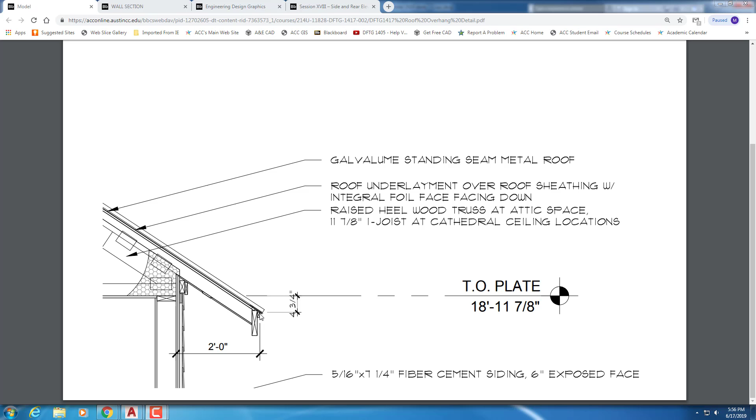Also, in this particular case, our roof pitch ends up, if we're at 2 feet out, we're 4 3/4 inches down, more or less fractionally, to the top of the trim. So that's what we're going to use in the elevations. So from the plate height, let me show you the wall section. From the plate height, which is here, this trim board ends up being lower than the plate. You never actually see the top of the plate in the elevation, but depending on where that is, it's going to determine how far this drops down.

And the higher the pitch, the shorter the overhang, because you're pivoting off of one point. Obviously, this point over here keeps getting less and less if you pivot off that same point. So you can kind of see it here. Here's the top of the plate. Here's the top of the trim. So the top of the trim here is 4 3/4 inches down from the top of the plate there.

Think of the framing, which we talked about last week, as the skeleton of the house that holds everything up. And it also drives where things are placed in the elevation. So you can think of the exterior materials as the skin, the framing as the skeleton. You never actually see the skeleton, just like you don't see the skeleton through your skin unless something's wrong. So it's sort of the same idea, but where that stuff is determines what you draw in the elevation and where you draw it. Okay, so that's just something to bear in mind while we do this.

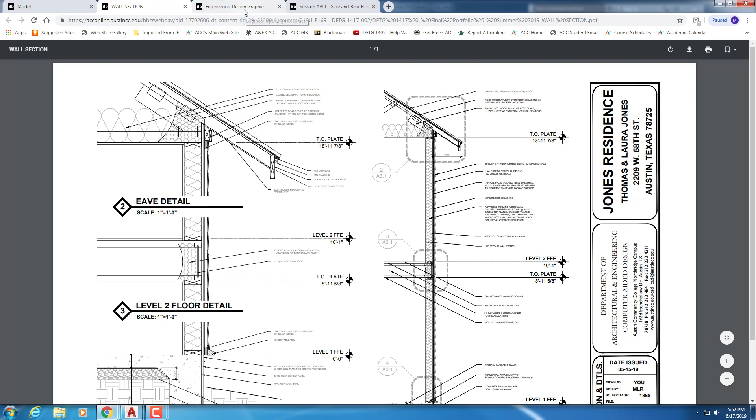So the very first thing we're going to do tonight is actually create a UCS to use. It just stands for Universal Coordinate System. It's a way that you can turn the drawing so you don't have to draw sideways or upside down, basically.

There will be several new layers for the elevations and also some new layers for the roof plan as well. You don't have to add those just yet, but there will be all those new layers, and then we'll create some new layer states as well, because we're going to need one for the first floor, the roof plan and the elevations, and also for the second floor, the roof plan and the elevations, so you'll be able to orthographically project things from the floor plan.

If your second floor is not currently stacked over the first floor, now is the time to move it to the correct position, because you're going to have to do that to orthographically project, like I'm going to talk about. All right, so UCS.

Some people like it, some people don't. I've been asked by Erling Clark to do it this way because it's the way they teach it in 1405. A lot of people actually line up the elevations all the way across and just project back and forth that way. But this is the other way to do it with the UCS, and it's a good way to know.

If you're using one building, it works pretty well. If you're using multiple elevations, it gets a little bit tricky because you've got so many lines going on, but there's a lot of lines just with one elevation.

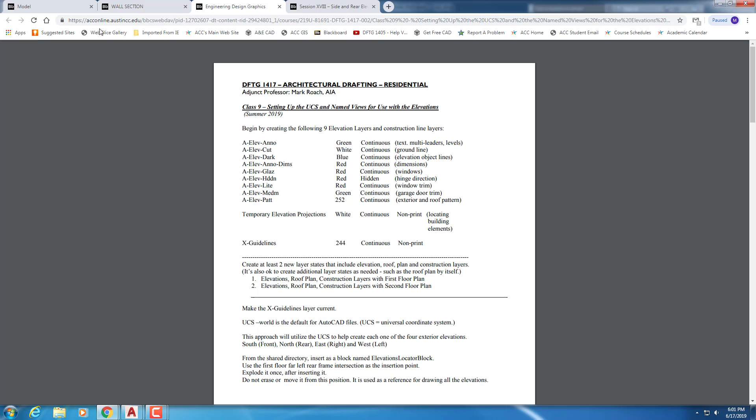All right, so I'm going to open AutoCAD. All right, so if you're finished with everything, this is for the first and second floor. This is where you'll be at, and you'll have the first and second floor set up.

I've got all my model layers turned on and thawed right now. By the way, this is turn all layers on, the third one down, and this is thaw all layers. So if you ever want to both turn on and thaw all layers, just hit the first and third buttons there, and that does it very quickly.

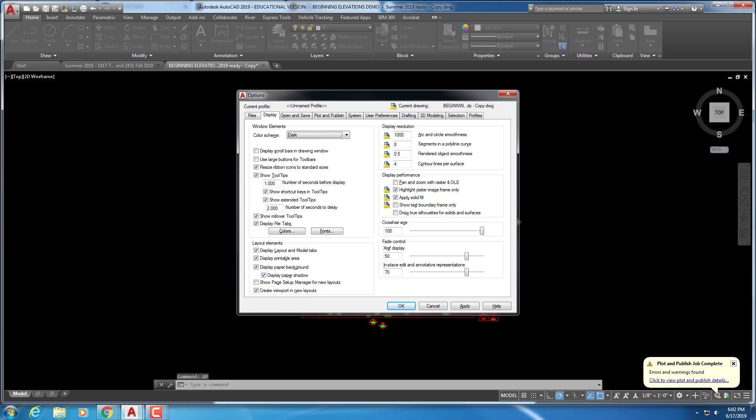Another thing I noticed with a couple of people, and I always forget to mention this, if you go to options and go to selection, I don't like the lasso at all because it doesn't work well for architectural drawings. I would uncheck that, and that way when you come back in and try to window or cross something, it comes in as a rectangle rather than that weird shaped lasso, which doesn't do you much good in architecture. It takes a lot longer to do things with that than just with the square.

By the way, there's a difference between windowing something and crossing something. If you go from right to left and get the green, it catches everything it crosses. If you go the other way and get the blue, it's only the stuff that's inside the box that it's going to pick up. So in other words, if I went this way, even though I've got three lines there, the only thing it might pick up is that, but it didn't even pick up that because that's a block. So let's try a different one.

So let's say like here, I crossed this line with it, but it didn't pick up that line because it has to be in the box for that direction. The other direction though, it'll pick both lines up. So the crossing direction picks everything up, the window. The other direction, the blue box, only the stuff inside the box.

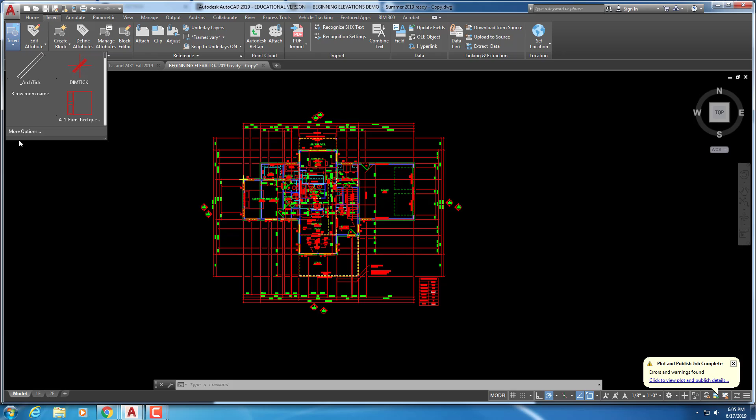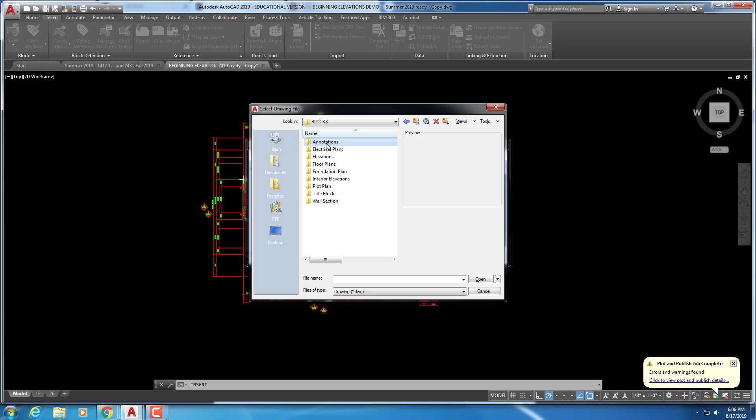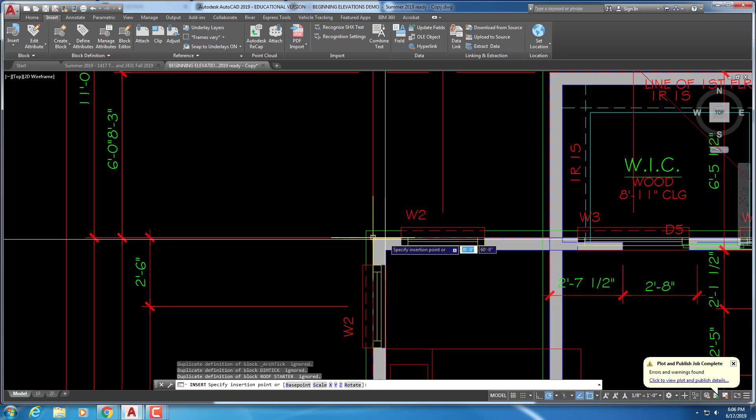It's going to come in with kind of an X. So basically it goes right here. It's the far left at the back, right there on the framing. Once it's in, it should look something like that.

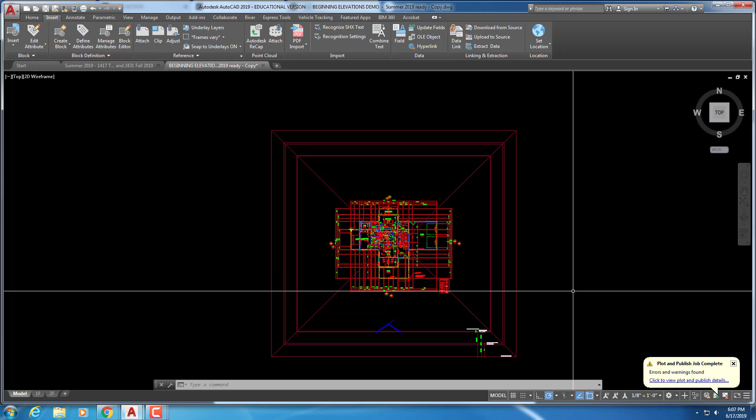Alright, I would leave it unexploded for now. We'll have to explode it in a little bit, but for now that's fine. Hopefully your ortho was on. We don't want to be skewed one way or the other, should be exactly vertical and horizontal. If you have a more square plan, you could have used a square, but basically I had to expand equally in both directions for this to work. But basically these are 45-degree lines, and as long as we're crossing the lines in the same place, we can project around.

Alright, to create the UCS, and I'm going to do the one for the right side elevation, or the east elevation, first. So looking at it over there, X would be up and down and Y would be at the bottom like a horizontal line, and you do that by using the 3-point coordinate. Alright, so you've always got the X direction, the Y direction, and then where they cross is the origin. So this would be X, like the ground line in that direction. This would be Y, and you can see that it turned the drawing.

Alright, so what we need to do now is come up here and name the UCS. It's the one to the left of the world there. Alright, so we got the unnamed, right click, rename, and we'll call it... I erased it, what is that? That's going to be the east, which is actually the right side. You have to okay that twice. I've never understood why you have to okay that twice, but you do.

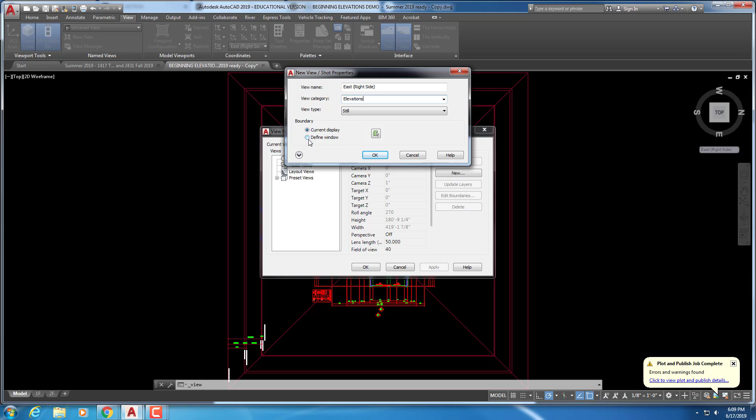Same thing we just typed in: east, right side. View category is elevations, view type is still. Current display would be fine, but we wanted to define the window. You can either check this or check this, it's the same thing, either this icon or that's going to come to the same thing, it's going to give you that. You want to go from the bottom corner to the top corner here, and then enter, and then say OK, and OK again, and that'll create a named view for that direction.

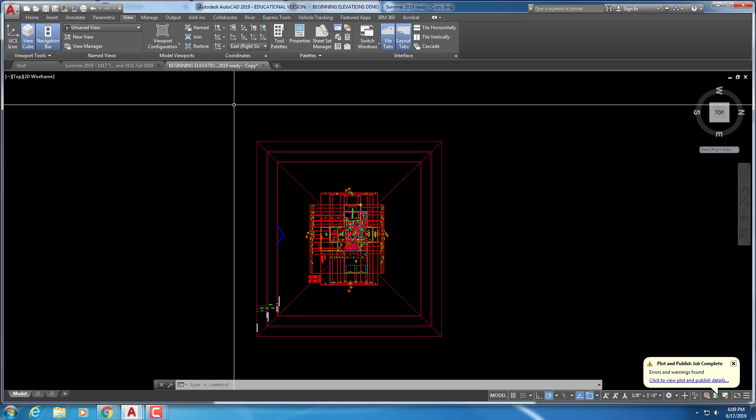Now if you could keep track of the X and Y without having to worry about it too much, you could just continue on from there. For me, it's just better to go back to the world and then work my way back through each elevation. So if I set it back to world, it sets it back to the original. So if I go to do the rear view now, this has to be X because that would be the ground line, and if I'm looking at it in that direction, then the left side's going to be over here. So 3-point origin, this would be X, this would be Y.

Garage should be over here. If it's not over there, you did something wrong.

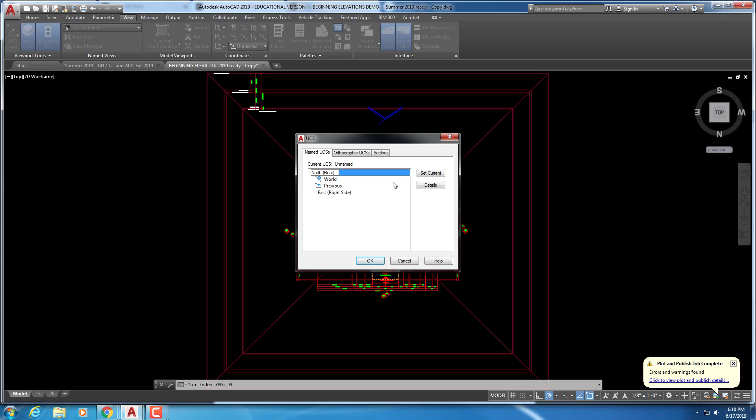All right, so then we're going to name that UCS, and this one's going to be north. Got to right click, rename, north, rear. Say OK, OK it twice, and then we still need to give it a view name.

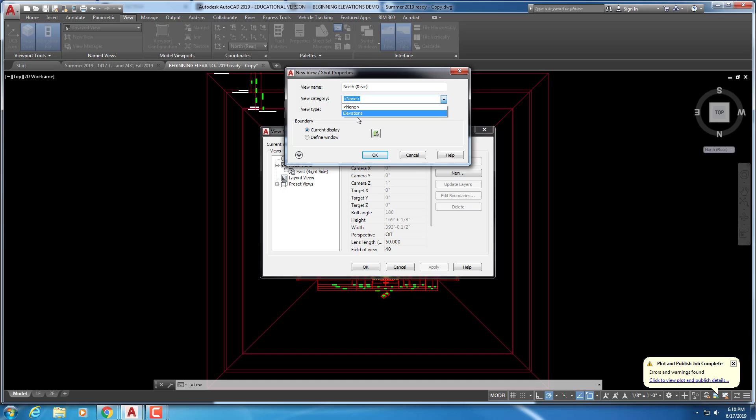So view manager, new. View name is, what did I just say, north. View category, you can just use the drop down because we've typed it in at this point. Hit the icon, go from this corner to that corner, enter that, and OK it.

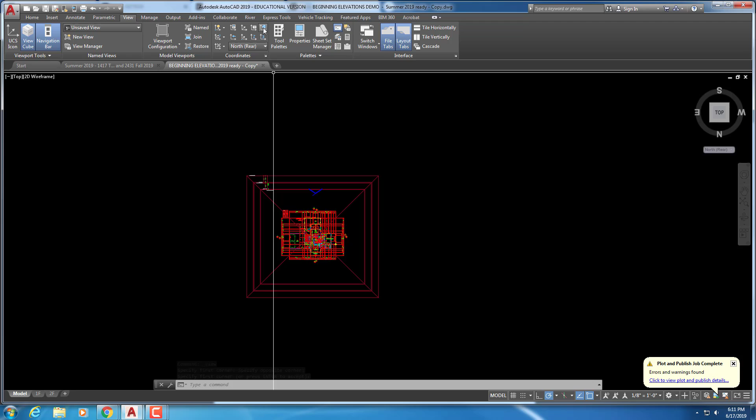Alright, so that gets the rear. I'm going to go back to world again. Again, you don't necessarily have to go back to world, it just makes it easier for me to think about it. Alright, so over here, this would be the X direction. That would be the Y direction, so 3-point.

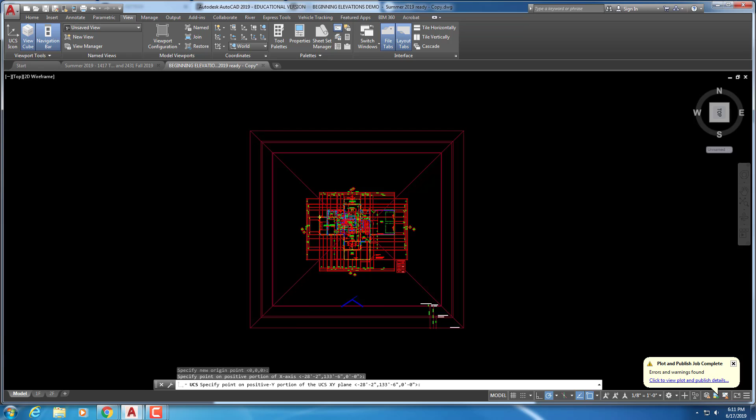Origin is here. I just almost did that wrong. This is the X direction. This is the Y direction. So the front porch is out on the right side, the rear porch is out on the left side.

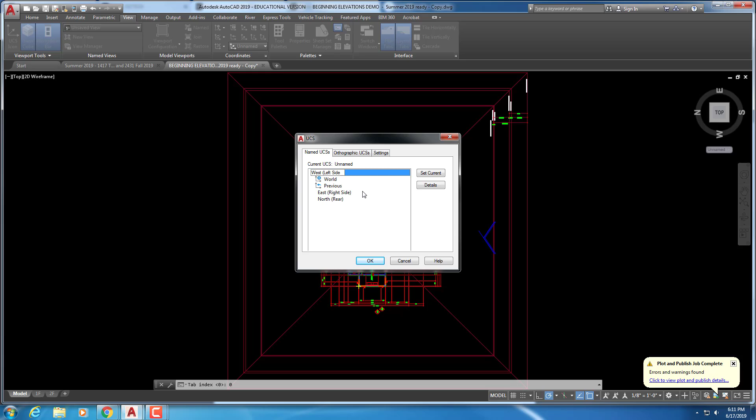All right, we're going to rename the UCS. So that's going to be west, which is also the left side. Okay, that twice, and then we're going to create through the view manager the same thing.

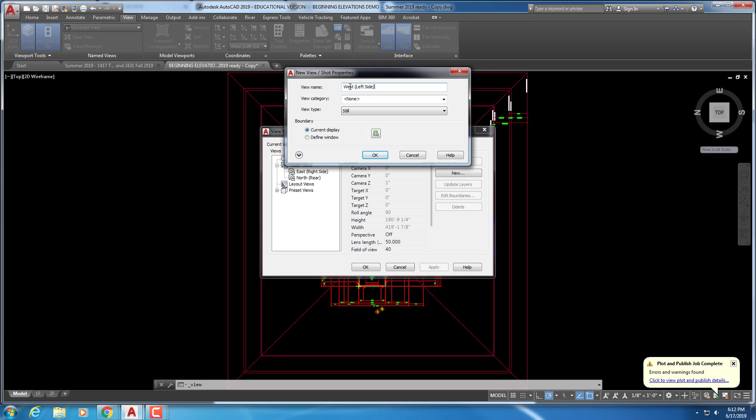Okay, that. All right, and then I'm going to go back to world again, which brings us back to the beginning. Technically, I guess you wouldn't necessarily have to create it, but to do what we're going to do with printing later, we need to set up a view for this. So we're going to go ahead and do it anyway.

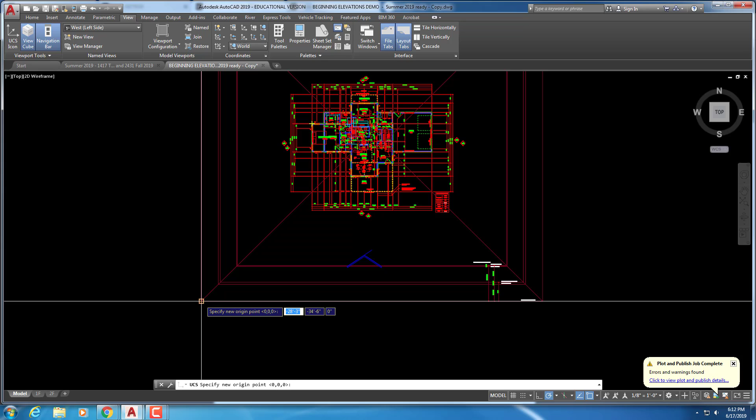So 3-point for that. This is the X direction. That's the origin. That's the Y. So it looks pretty much the same, but we still need to rename it.

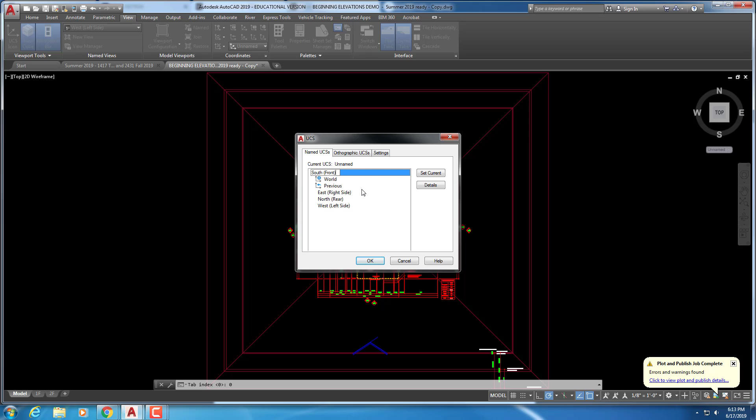So this happens to be south, which is also the front. Okay, that twice. And then we're going to create a view for it through the view manager. New, again, south.

What did I just say? Front.

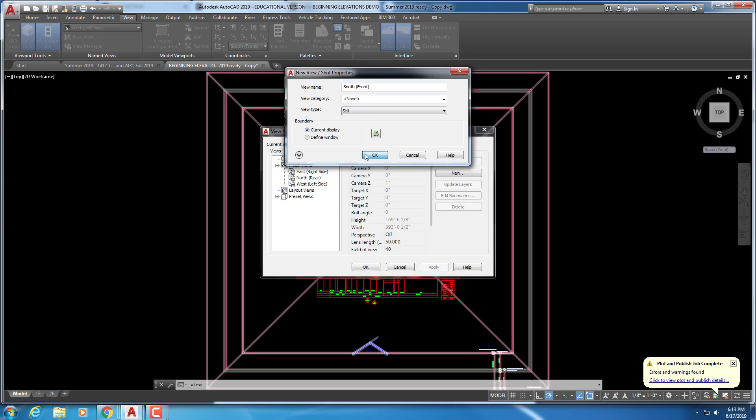All right, so we now have both named UCS and also named views. So we've got east, north, south, and west, and we also have it here.

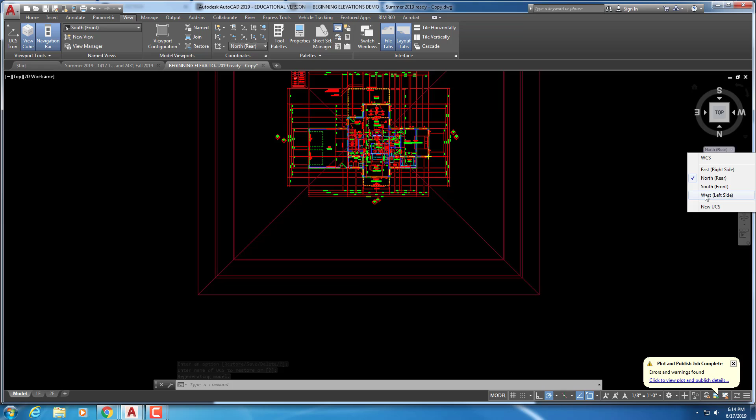All right, so the advantage to this, or at least some of the advantage, is you can turn the drawing now in the direction you want to. Typically you would draw down here because you'd be projecting down and that's the direction you'd be drawing in. So you could pick any one of those and turn it whatever direction you need.

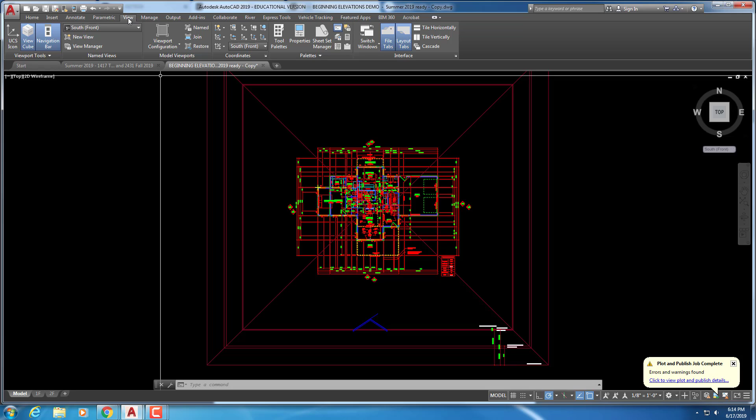And you can do it from here. So whether you're in the floor plan or in the elevation or the roof plan, you can turn the drawing whether or not you're in this particular tab. So it allows you to do that over here.

Now, before we do anything else, you should probably create the layers, because we're going to use those to set up the layer states. You're going to have several new layers for the elevations and also for the roof plan.

So, elevation anno for the text, dimensions for the dimensions, cuts the ground line, darks the main part of the elevation, glazing is the glass. Hidden is usually the hinges on the windows and doors. Lights has to do with trim and some other things.

So does the medium and patterns, the siding and roof patterns. And then we've got text dimensions, basically the wall layer and the roof outline itself, and then beams, and then the patterns on the roof. So all these layers here, there's two different handouts, one for the elevation and one for the roof.

The roof, I think, is behind everything else at the very end. The elevation layers are here at the beginning. It also has some additional temporary elevation projections. If you want to do that, you can. It's not necessary, not technically necessary. Sometimes it's good to have that when you're not sure where things are going.

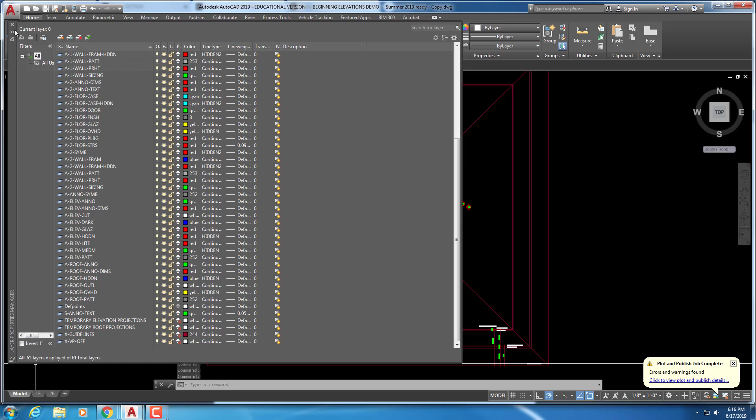So if you will spend a few minutes and create those elevation layers and the roof layers, then we'll get back to the layer states that we need to create, and then we'll start the elevations themselves.